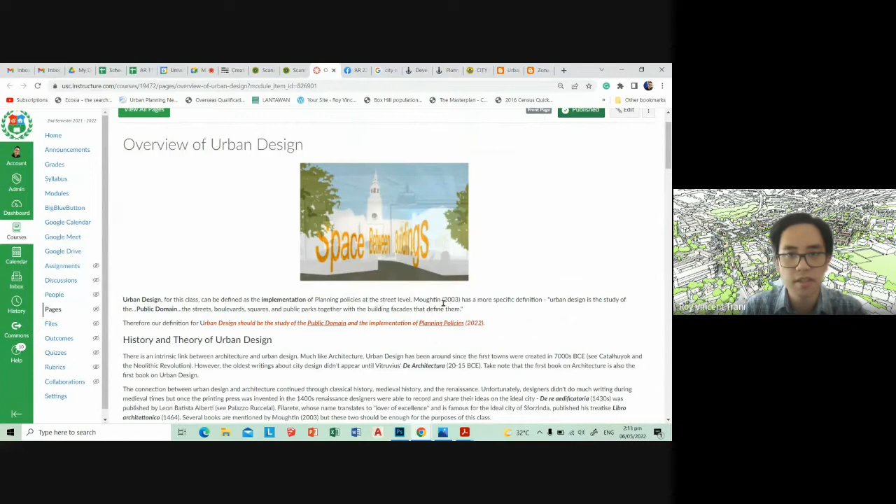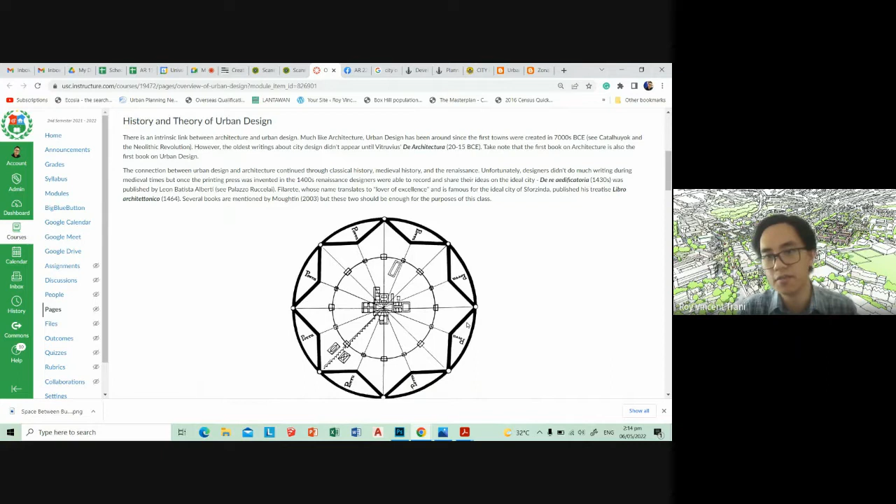Let me save this image here so we have a visual aid. And then we have the history here, starting out with ancient history, basically very focused on geometry. Dividing land was important because that's how people would get earnings or develop themselves. If you own more land, even back then, that meant you were like a king or someone important. And with the land you have, you could create your own food, hire servants, sell the food for money, and get even more servants, get even more land, etc., etc.

And then we had a renaissance, both in actual history and in urban planning, where the Renaissance architects and builders used principles from Roman architecture and combinations of Muslim and Islamic architecture, and basically architectures from different parts of the world to create this order, like what should be in a city, how should we design our public spaces.

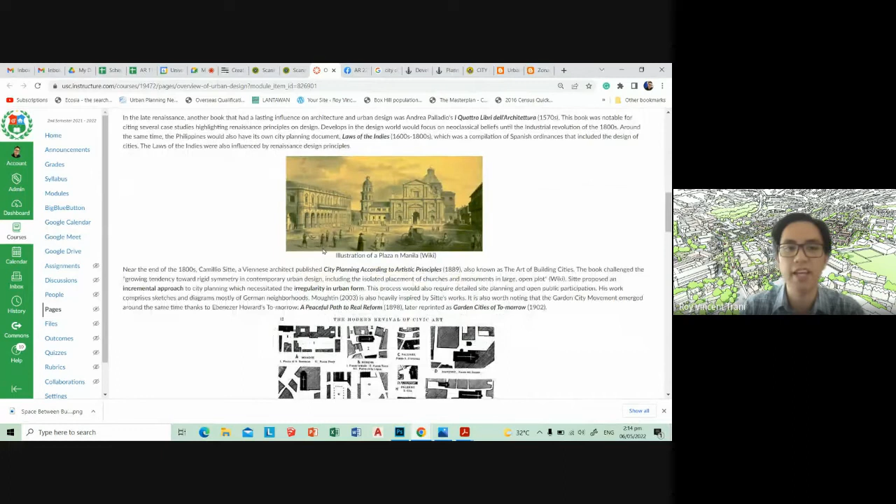And as we found out, the plaza is really the most important place in a city. It's a public plaza because it's a place where people gather, people see each other, the government supposedly showcases that they're putting the best interest of the people in mind, not just designing for the elite, but also for all the people.

And then the public plaza would be the location for where you have your church, your public offices, and everybody gathers there. Everyone important is there, and also everyone who is least important also gathers there. So it enriches the city where everyone, regardless of class, can come together and enjoy the space.

And then further developments in the 1900s basically have different ways of breaking down the different elements of a city. You have the path, edge, district, node, landmark. This was by Kevin Lynch.

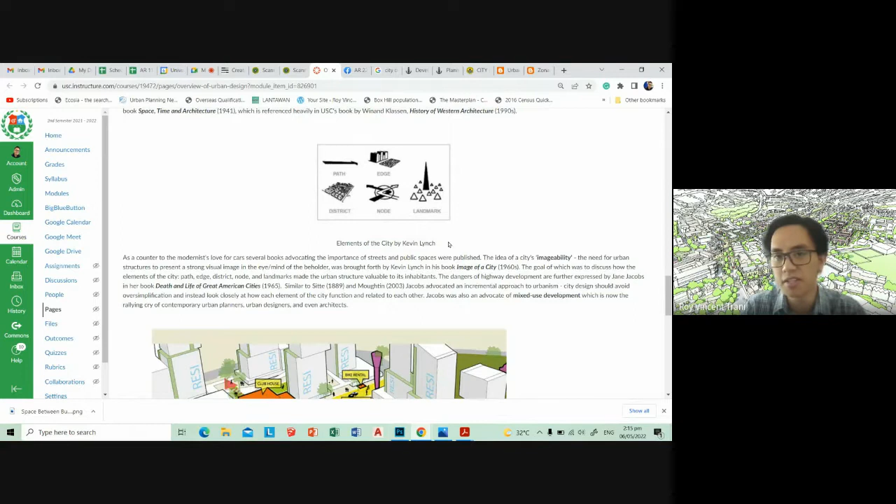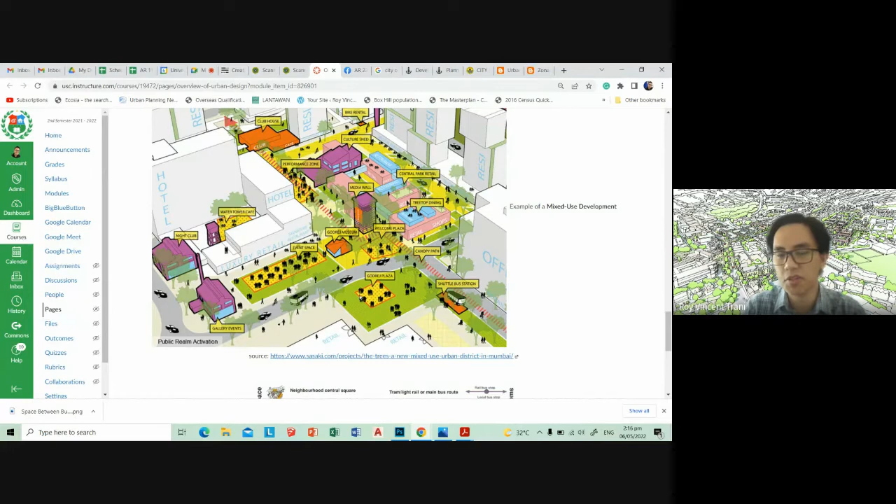And now there's even more subtlety and nuance in how public space is designed. So we're thinking about the uses, the mixing of uses, the importance of pedestrian zones, the regulation of vehicles, and the importance of spaces where the city can breathe, not just an open plaza devoid of vegetation, but also some kind of vegetation, especially in a very built up area.

And then we have the movements of the urban task force, talking about mixed use neighborhoods, but this is a bit more on planning. So how do you actually develop these mixed use neighborhoods? Um, what do you call this?

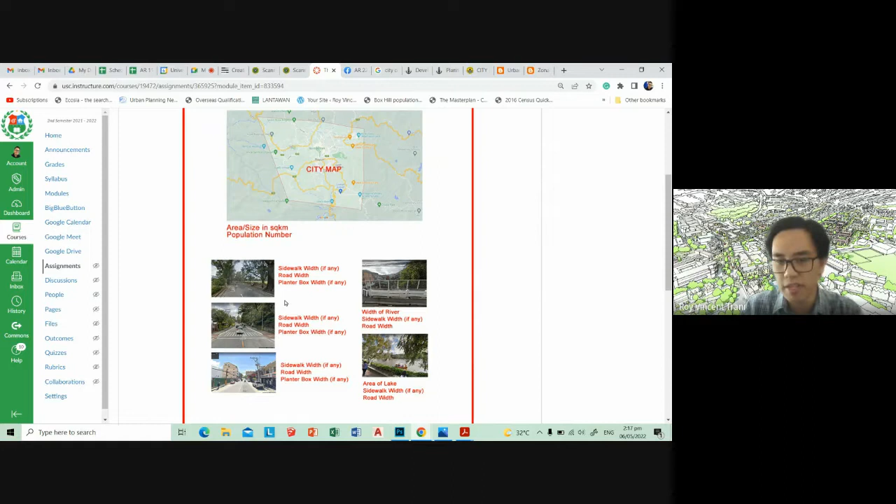That's why we are talking about the urban design process, basically evaluating what we have. For example, are your city maps? I think we'll need to do a callback to that. Like you already did this, and then just analyzing now with your knowledge of plazas and streets, you can evaluate where could be places that could be improved or where are places that should be maintained.

And then we had the history of urban planning here, urban planning and design in Cebu City, because this is the data that I have. I don't know about data in your specific local community, but at this scale, it's really more urban planning.

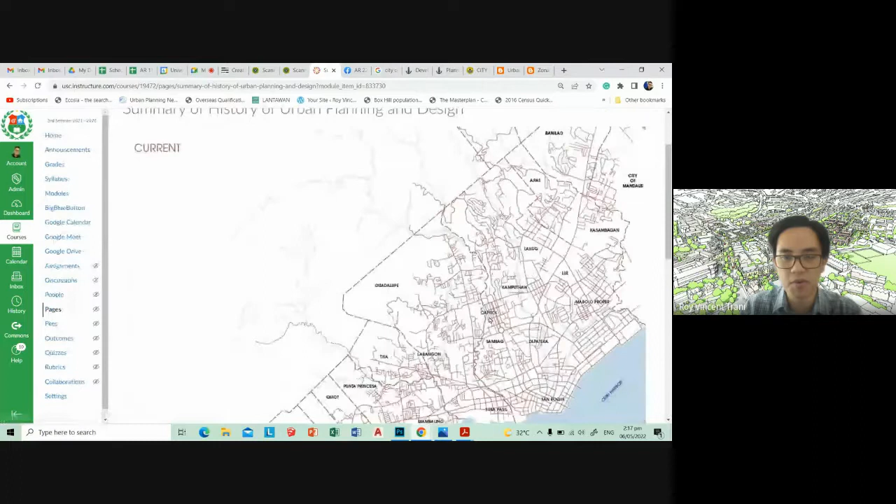So as I keep on repeating, urban design is really the street level. So everybody did that for the most part. Pasara mga tao. I think only one or two are having trouble with that.

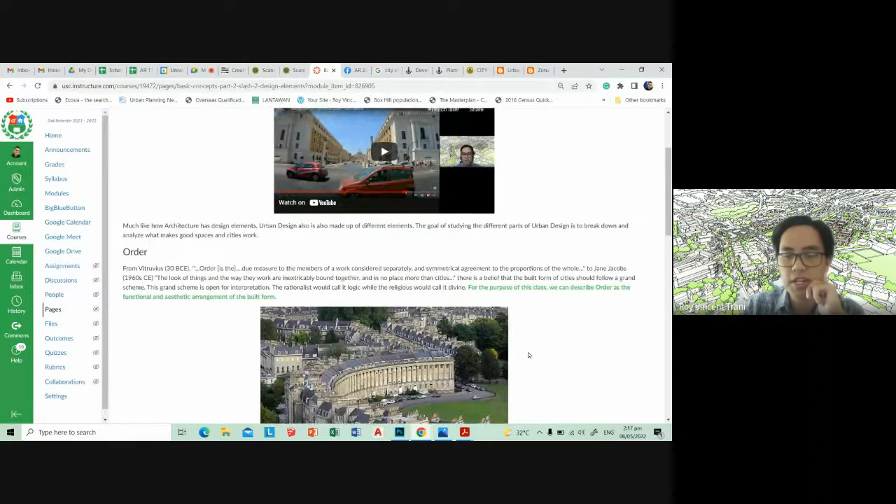And then the process of designing for people. As architects, we are thinking about just our building and not the surroundings. So really considering how our buildings are accessed. This is why our current plate, the bus terminal, is very much focused on accessibility and universal design, because we were trying to put the focus back on the people.

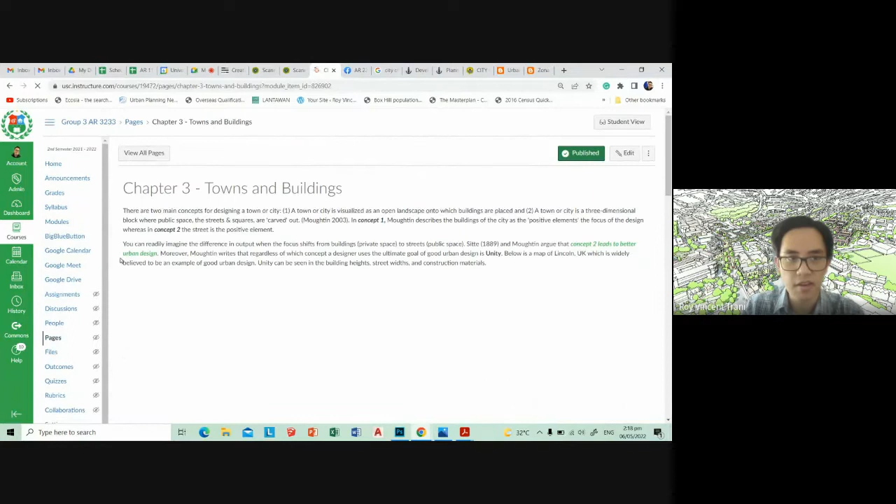So how do you create good design? You have order, unity, proportion, scale, rhythm, etc. And you have examples in Moughtin as well. Towns and buildings, talking about the 5 methods of composition. But before that, you have the two concepts, the informal and formal model.

With both these models, the focus is on the people. So this one is specifically about the positive elements in design, where either the building is a positive element or the street is a positive element. We want the street to be the focus of the design, and then buildings and landscapes are where we talked about the formal and informal models.

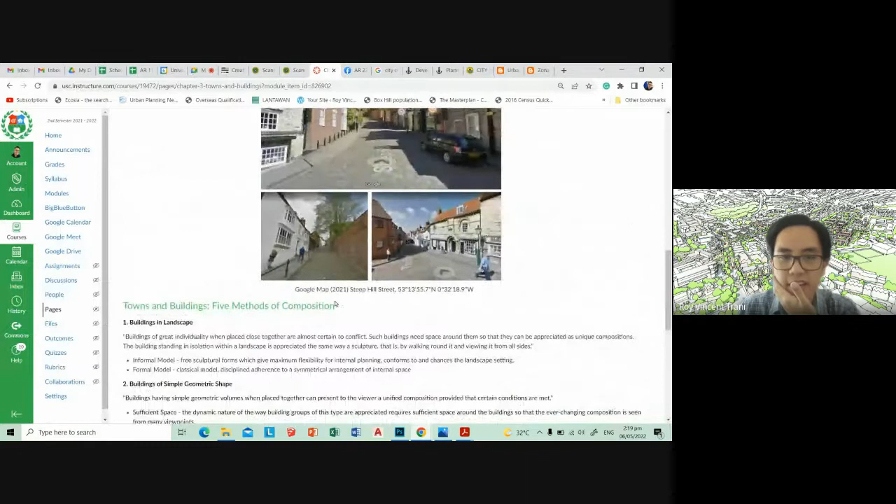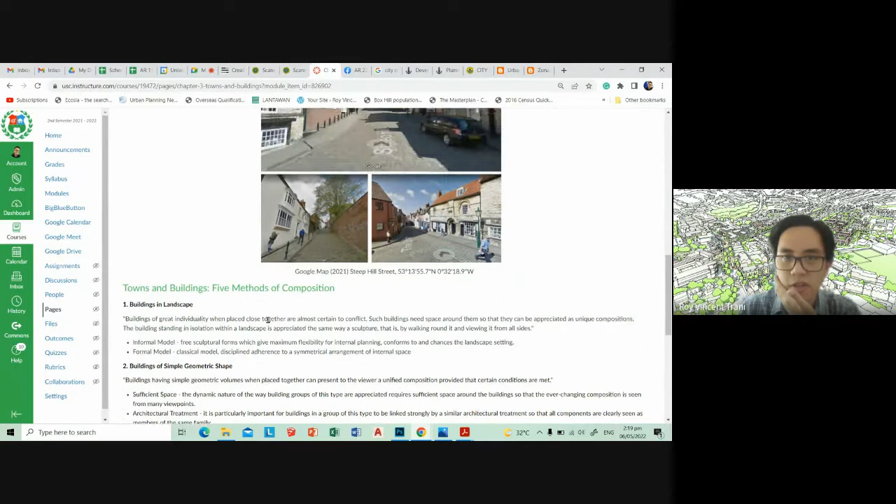Each of these five methods of composition build on each other. The first one is determining whether your area has an informal or formal building composition. Informal means more flexible, sculptural forms with less unity. Formal is the classical model, like similar building heights and similar architectural styles.

If you have either the formal or informal models, they can be arranged in either a simple geometric shape or the right angle. Then on a bigger scale, are these urban districts designed according to axial compositions or spatial compositions? Axial composition recalls the concept where the buildings are the main elements, while spatial compositions have the street or public space as the main element.

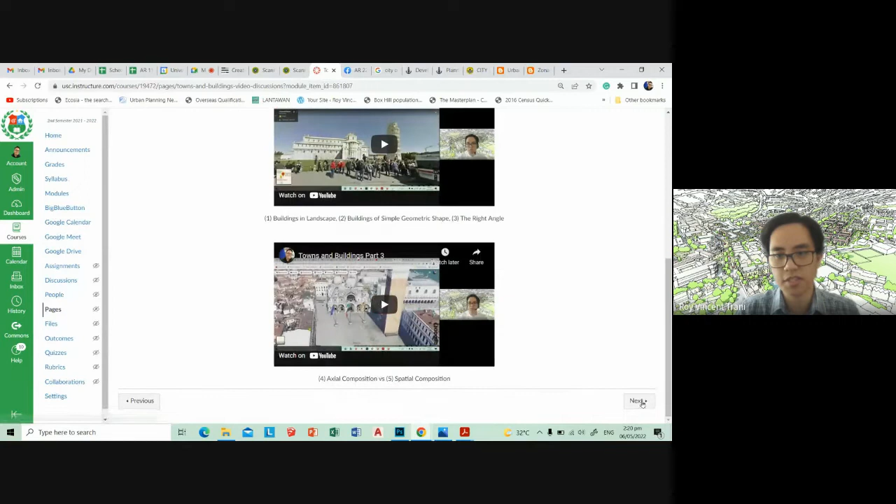And then the public plaza—really a gathering space, usually without much vegetation. There were five forms of plazas we discussed: closed plaza, dominated plaza, group or linked plaza, and nuclear plaza, meaning it has a strong node—I think nodal plaza would have been a better term since nuclear makes me think of something else. Then there's the amorphous plaza, without a sense of enclosure.

The example we didn't really discuss is New York Times Square. If we look at it in Google Maps, it doesn't conform to any of the four previous plaza types. You can't even tell it's a plaza—it's more like a very busy intersection.

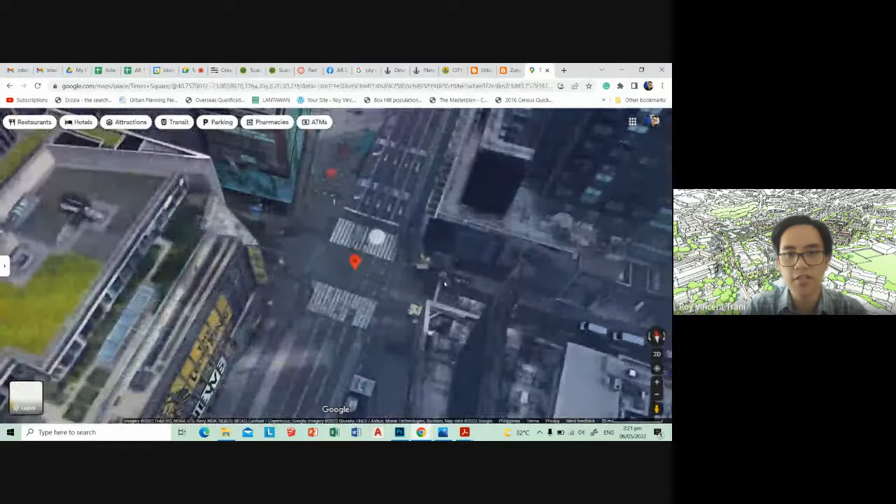Notice the sense of enclosure isn't provided by the buildings, but rather by the billboards. All the signage is more or less at the same height, but the proportions are very large, like 20 to 30 stories above human scale.

This particular sitting space—I thought they closed it down, but no, it's not closed. It's this small island, maybe covering a few blocks. I think they converted this recently, because on Google Maps it's still shown as a road. So there used to be a road here, and now there's an actual plaza. I think this is fairly new.

So it doesn't have proper enclosure—it's enclosed on two sides by vehicle roads and on two other sides by pedestrian paths or walkways. Actually, it's a road on three sides and a pedestrian walkway on the fourth side.

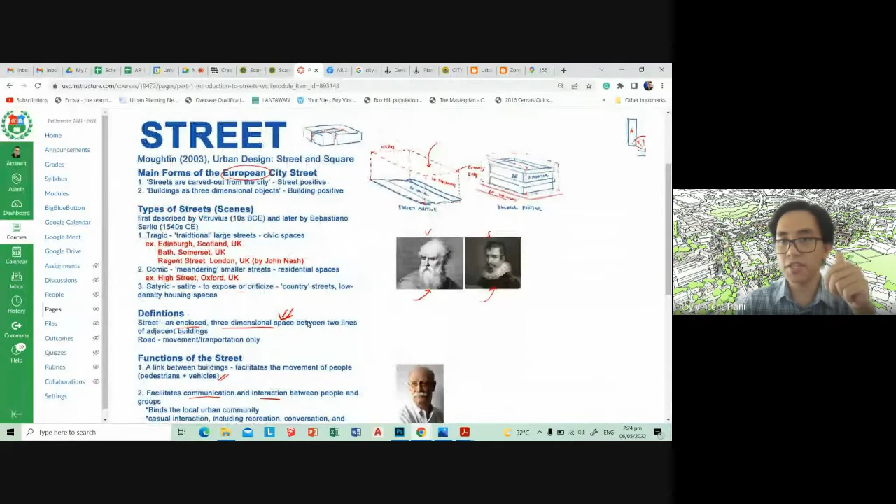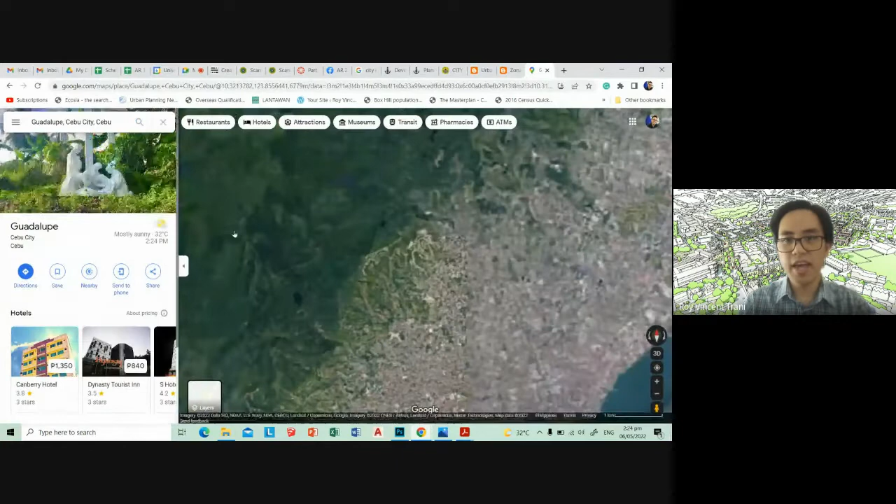So let's take a look at Guadalupe, for example—Guadalupe in Cebu, because there are Guadalupes around the world. A lot of us think that because we're in cars, driving or as passengers in cars and jeeps, that this street, particularly this part of Guadalupe, is very inefficient, like it's making our traffic slow, making our car slow.

But think about all the people who use the market space here, all the people who use the sidewalk, all the people who cross BDO to get to the markets, all the people who visit these spaces. This is almost like a mini plaza here, or an actual plaza.

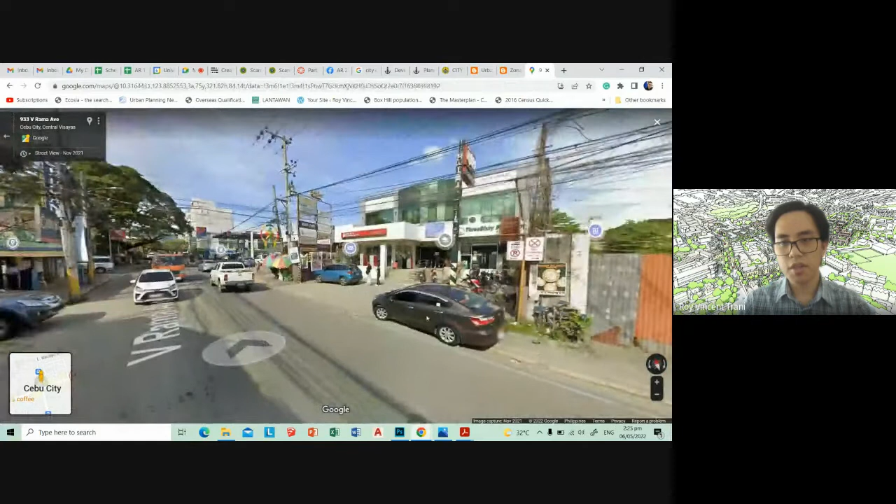Market, public area over here. This market provides service not just to those people nearby, but from the number of visitors—a good chunk, let's say the public market area here, the Banawa public market is that big, but its area of service could be much bigger because a lot of people are using the jeeps, etc.

So anyway, what I'm trying to say is the slowing down of traffic is really not so much an inconvenience in terms of urban design. It's just, I guess, the complaints of the car-dependent upper class, because the only people affected by the traffic here are the people trying to get to their homes.

If you're of the lower or middle income brackets, you wouldn't be able to afford your own private car, so you'd expect they'd be walking here or using public transportation to get here. So what Moten and I myself are trying to advocate is that we should rethink our spaces, not so much for vehicles, but really for people.

The other issue here in this Banawa public market is that it actually has a functioning sidewalk where people gather, communicate, and talk to each other. The only problem is that it's dirty—that's the main issue with a lot of people coming together. So how do we make this public plaza, this urban design space, better using the principles we've learned so far?

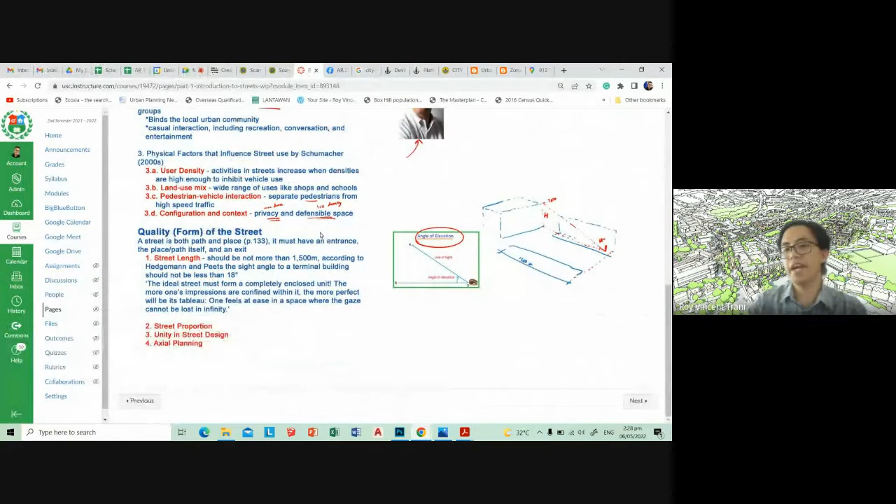So that's where we talk about the urban design guides, the building codes and regulations, and the principles we discussed about streets. I actually don't have the videos up yet—they're still downloading, or they've downloaded, but I need to upload them to YouTube. Some of the biggest factors—it's already 2:28—some of the biggest factors or key things you need to remember: if you don't remember anything, just remember this, the angle of elevation.

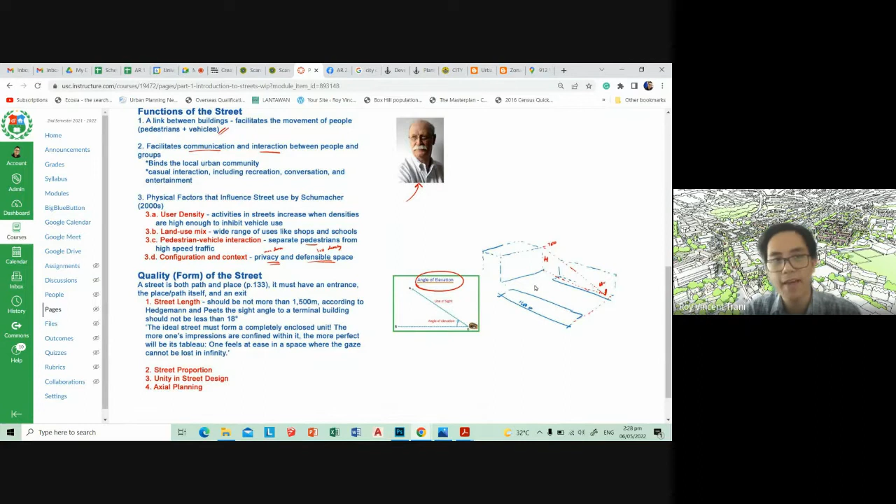That's basically the angle where people's line of sight can really absorb the height of a building or your building design. Streets and public spaces should take note of this angle of elevation. And as we discussed before, Cebu City was very good at this back in the 70s.

Where before, we had the Capitol building easily viewable or easily seen from Fuente Osmeña Circle. And now, because of people who don't know urban design, or people who know urban design not being listened to, and people who think tall buildings are a sign of urban development, like vehicles are the way to go—now this view of the Capitol building from Fuente Osmeña looks like this.

And maybe you don't have this view anymore. It's always like an aerial view looking at the Capitol. Who gets to see this view? It's the people in that hotel there, what's it called? Crown Regency. So that view is clearly from Crown Regency, or somewhere around there. If you take a camera from there, this is probably most likely a view from Crown Regency or one of these hotels here.

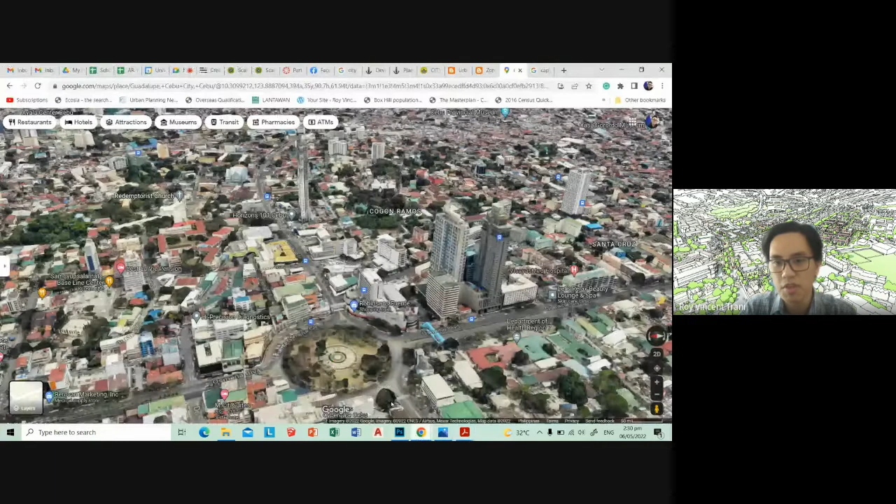Now, why do you think that's the most sustainable thing to do?

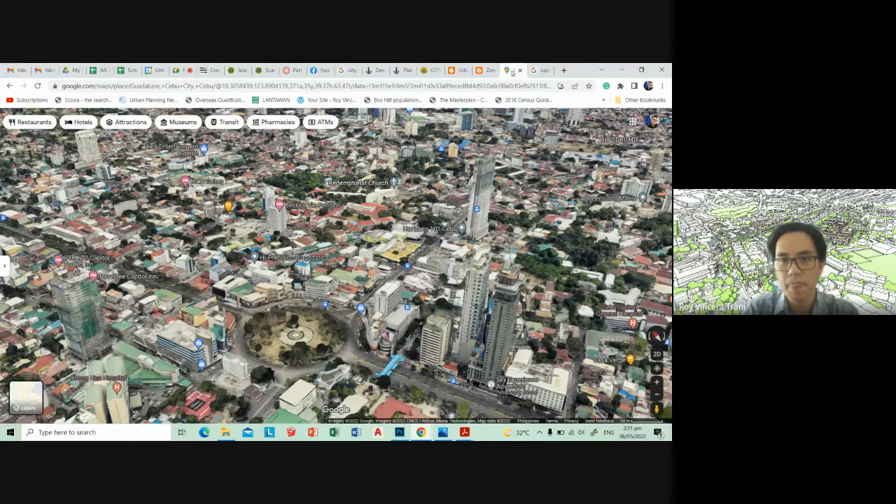So with all that recap, with your knowledge of urban design, plaza and street design, plaza and street forms, how do you think we can get Fuente Osmeña Circle back?

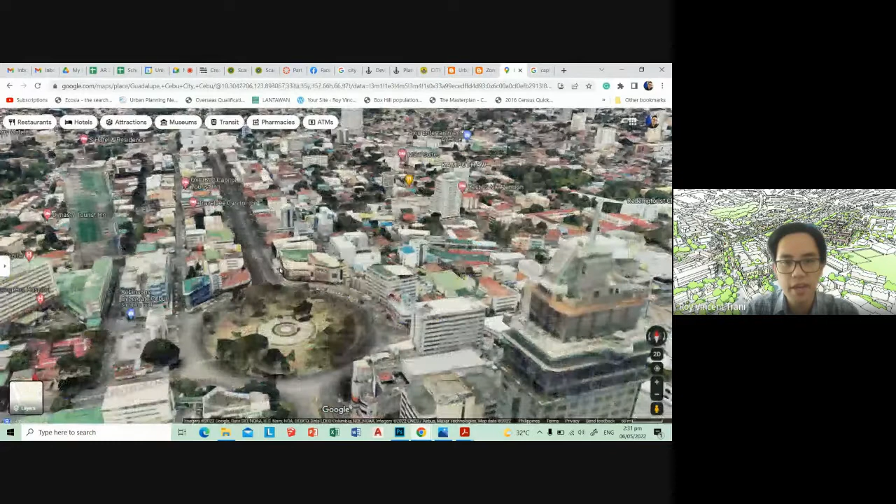Let me take a view here. How do we get that view back? What's going on? We can move a bit over here. Where is the Capitol building? Can't even tell. Oh, there it is. I think I'll move over here. How do we get that view back? This is it today, this is it before, like 1940s versus present. How do we get this back?

So for class participation or attendance, the floor is yours.

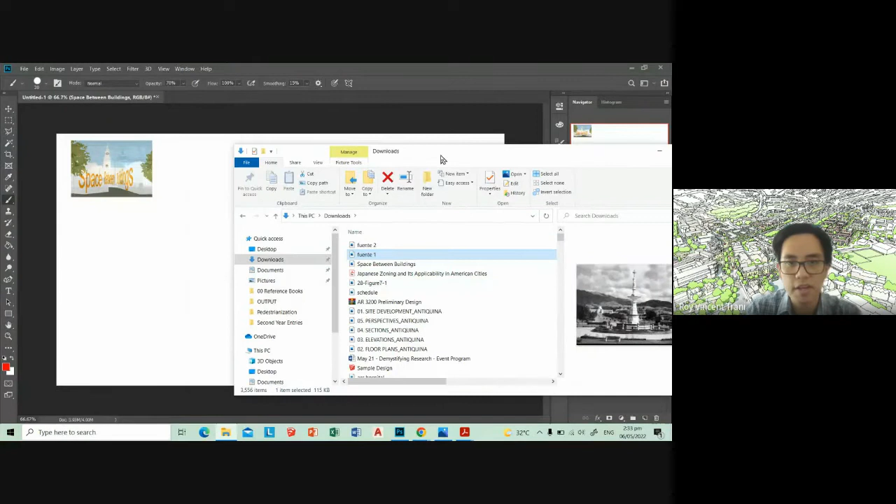And it's very likely that your areas are not suffering the same problem, but have their own unique situations. Probably a lot of you who are not in Cebu City have a lot of good urban places and spaces, and it's really more of a matter of maintaining those spaces.

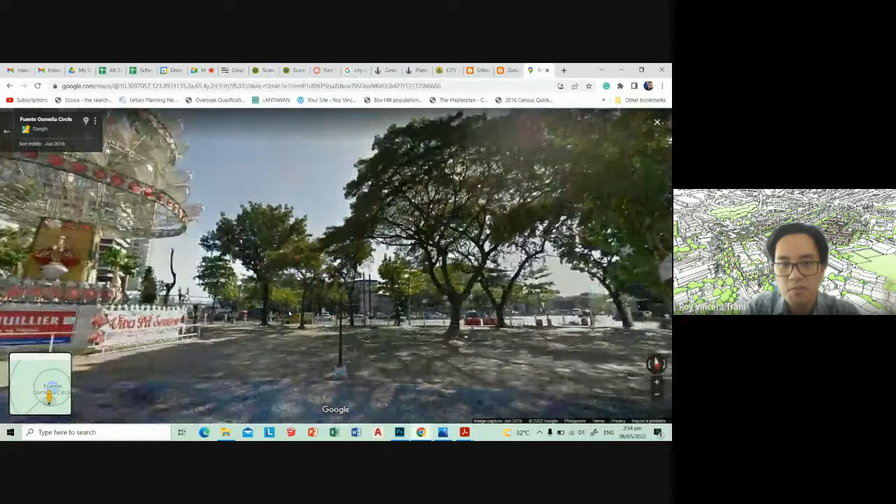To regain the view, I guess the only thing I can think of is cut the trees, maintain a certain height that will keep the line of vision. Really, yeah. It seems very anti-tree, but really these trees are not very good for maintaining the field of vision and maintaining a sense of place, because it isolates the plaza. It separates it from the urban fabric. I think the reason we're slowly removing these trees is a lot of people are realizing that. Some of the previous professors mentioned that at night crime is very high here because people couldn't see what was happening behind the trees, and it was very dark. I think now they're adding more light and reducing the trees to maintain the vision. Yep, that's basically it.

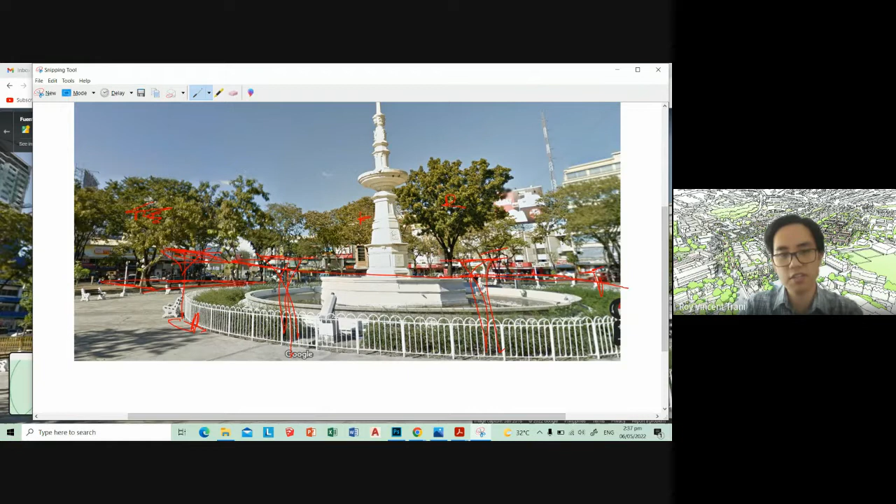Maybe we need some very light, small, shaded areas, not really umbrellas, but something here. And then definitely the most obvious thing is to remove the trees. How do we remove the trees? Maybe one by one, focusing on the areas highlighted here, something like that. And what else?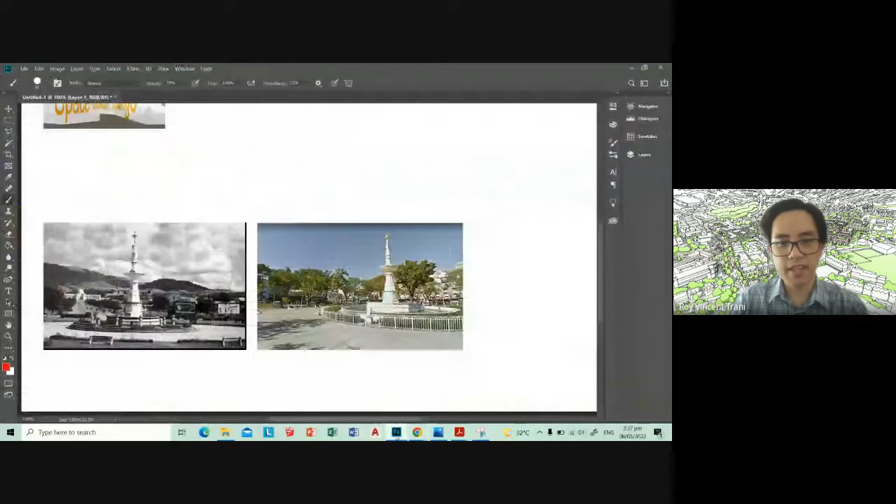So let's think about that. Let's see over here. Oops, not that one. How about this one? Okay.

So think about how many are from Cebu City. Let's see, could you raise your hand if you're from Cebu City? How do I have it so I can see everyone? 7 people. How many are from Cebu City? Please raise your hand and keep them raised because we might need to wait a bit for everyone to raise their hands. Okay.

Actually, for it to be more in line with our design project, let's just do it with our design projects. Like in your design, how would you improve vistas, since I know the site doesn't have a lot of vistas? How would you improve the urban design with the goal of giving people a view to the surrounding buildings?

The unfortunate thing about the SM site is there's really nothing there to view. So I think your building has to be the highlight of the design. How do you get your building to become more prominent in your design using the idea of maximizing the angle of elevation for viewers?

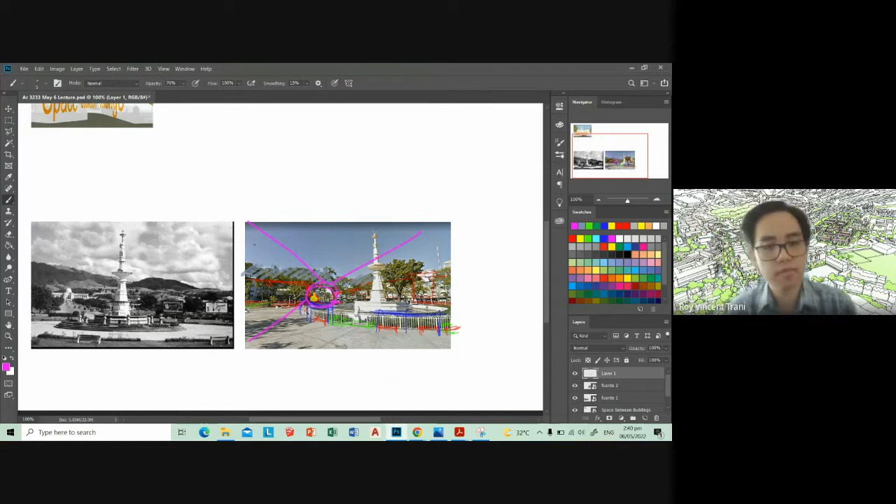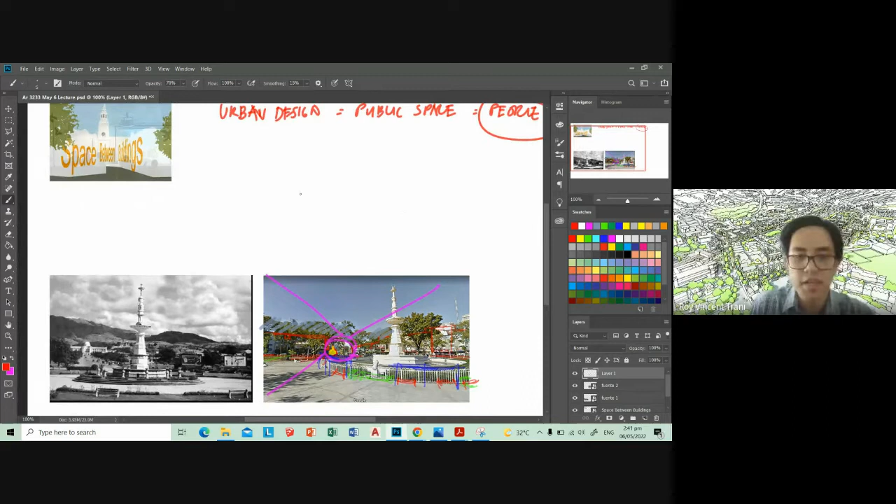Let's see here. Summary: urban design equals public space. And who wants to use the public space is really people, so no longer public space for vehicles—public space is for people. So the key thing we learned from plazas is that there's a limit to how big plazas can be. Limit plaza size to, let's say, maybe 50 by 50 to 150 by 50, maybe 200 max square.

For streets, they should be gathering spaces as well. And then we learned about the angle of elevation. Moulton would say 18 degrees, but some newer books would say 25 degrees. So the angle of elevation: you have your building here, you have a person standing here, and the angle of elevation relates to how far the distance is.

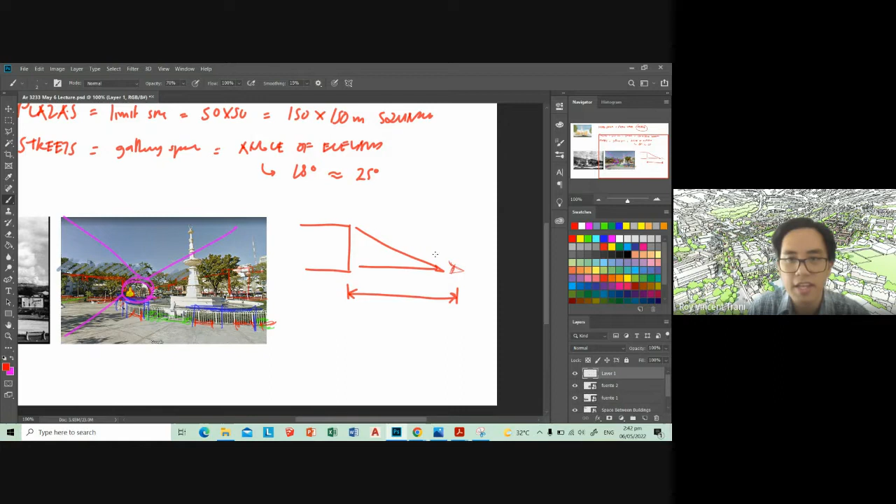Sorry, the angle of elevation would dictate how far your person should be in order to see your whole building. Let me put that onto his head, or maybe I'll just make an eyeball here, looking at the building. The angle is 18 to 25 degrees. So that's basically our whole semester.

Plazas need to be limited in size, and streets are gathering spaces. Whenever we design buildings, since we're also in architecture, we should allow for an angle of elevation of 18 to 25 degrees for our whole building, or at least maybe 3 out of the 4 sides, especially in our bus terminal. Let's just call this viewing distance, there isn't really a technical term for it. We need to maintain that for our building.

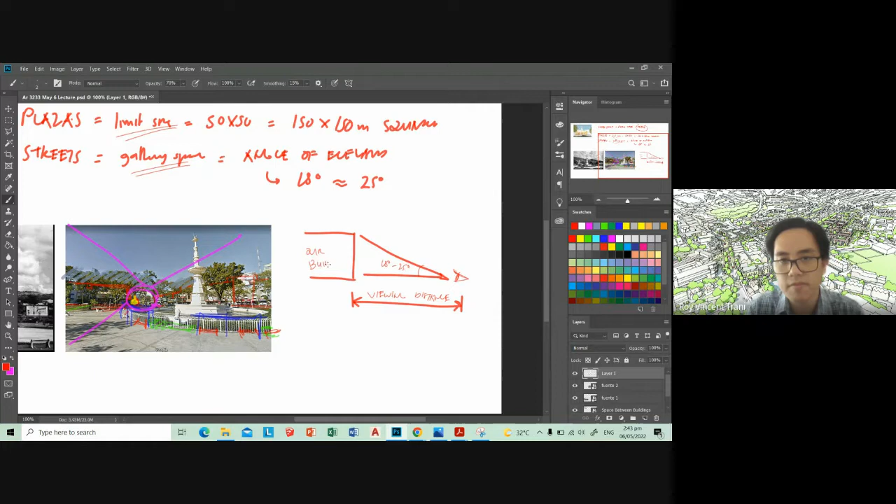Seems like people are a bit slow today. Oh, there's one here. Wait, that's for the Cebu thing, right? Let me stop presenting so I can see. There was only one person from Cebu? I think there's a few. Can I see a show of hands for Cebu? 1, 2, 3, 4, 5, 6. 6, right? I was expecting more. Maybe the rest are from Liloan or something, not Cebu. Probably a good reason why we should focus on your architectural design plate instead of Fuente Osmeña.

So for our final project, it will be a combination, I think more essay type. Sorry, we didn't really get to talk about the standards. Essay type: application of urban design standards in your bus terminal.

And there's still that one student, Paglinawan. There she is. Ooh, it's kind of hard. Maybe I'll just give you a reading assignment, and we'll get a presentation from you. You skipped out on 2 presentations, maybe we can have 1 big presentation for you. Plus, I don't want to hassle you as much since you're already graduating.

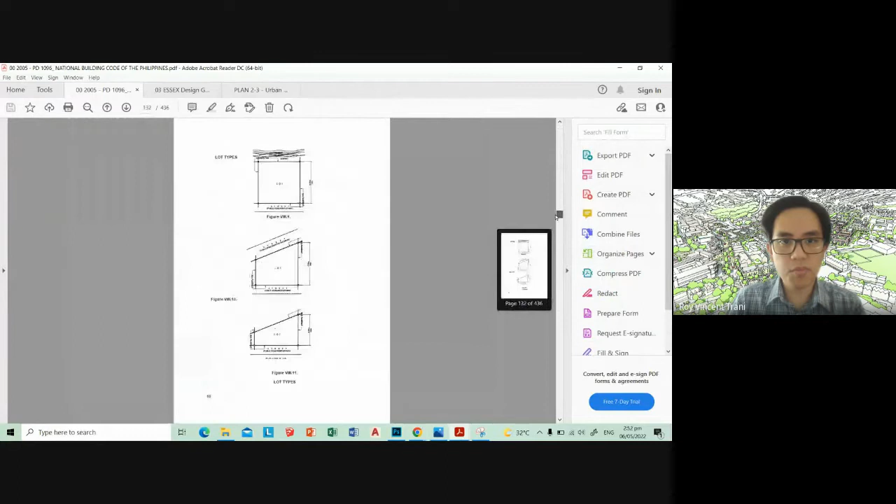So what are these urban design standards? Let's look at the building code, I think this is the most familiar. If we go down here near the middle, somewhere a bit more here. This is section 7, G1, figure 8 G1 under easements. So we have sidewalks, carriageways, promenades. Promenades are basically just wider sidewalks. This is more waterfronts, easements refer to waterfronts.

Do we have, let's see here, we have the water line over there. Maybe this is where I can introduce the waterfronts. I'll handle the waterfronts because we already had 2 rounds of presentations. Maybe we can get Paglinawan to help me with this.

And then over here, we have view corridors and sight lines. The carriageway portion of road right-of-way shall be free of structures, particularly commercial signs that will impede view corridor and the sight line, see figure 8G4. So I think we'll see that here, this is the 8G4.

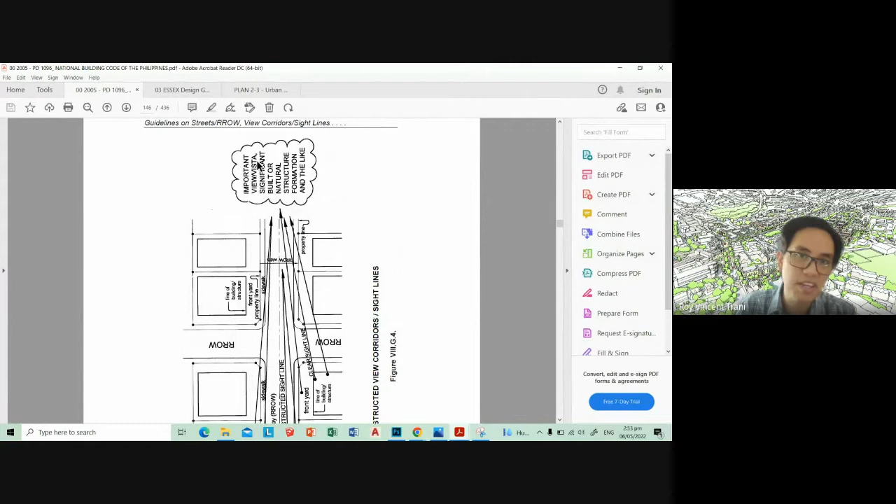So this is already in the law, but for some reason we didn't apply it in the Fuente Osmeña Circle. Like the important building here, important viewing, view/vista, significant built or natural structure, formation, and the like. But they did not apply this in Fuente Osmeña.

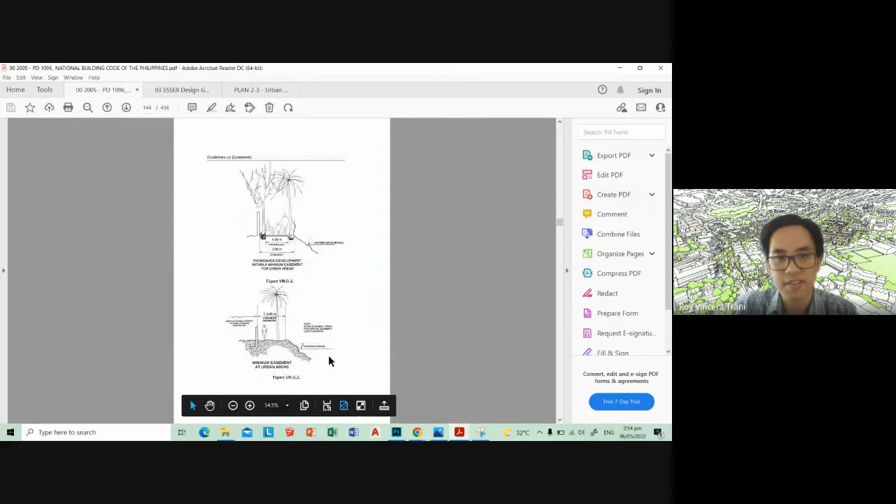Like clearly it says here, the road right of way. Let me go back again. Clearly on view corridor, section 8 of the building, section 8 of, what do you call this. Section, I think this is under, it's not even 811, which is artificial ventilation. Guidelines on easements, view corridors, this is a different section. I think this is still under, definitely not anymore under artificial ventilation, but it's its own section.

Basically, the easements, view corridors, sight lines, street, road right-of-way section of the building code, which is in section 8, already says that we should maintain these things. We should protect our sight lines, corridors, and important vistas.

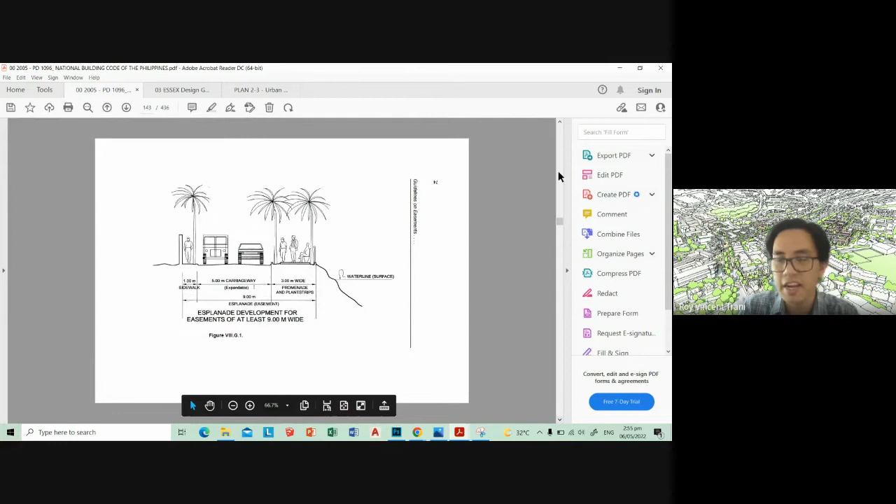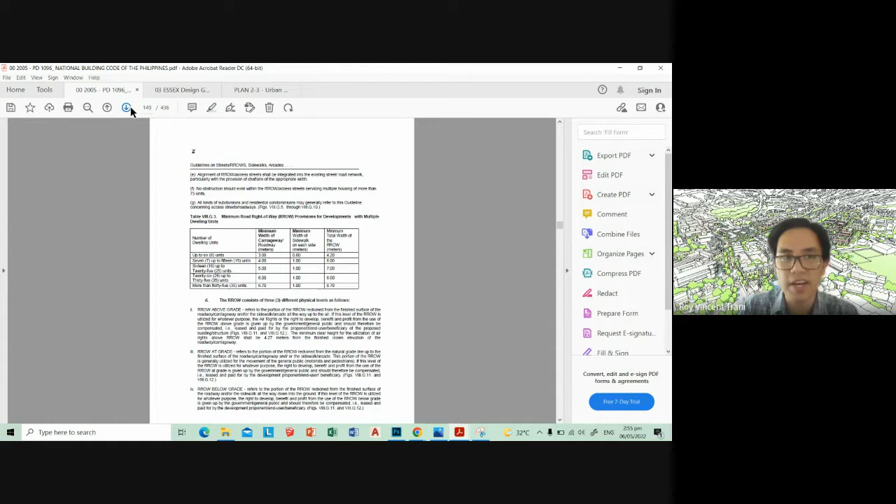But as we all know, the immediate monetary gain is not very apparent, so it's not maintained. Whereas if it was maintained, we would have more tourist sites because these vistas generate economic income or activity. But it's very long term, and with the way urban planning and design is being done today, the ideas are very short term. Like how can we get money right away? And then it's usually

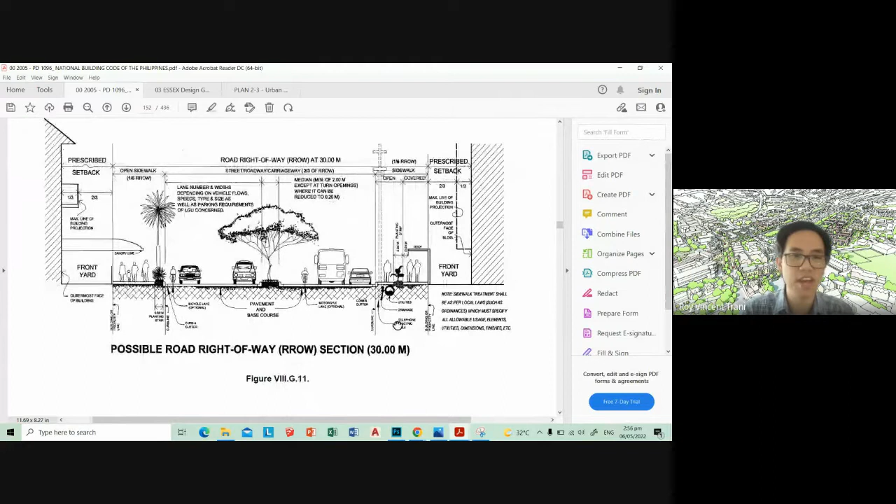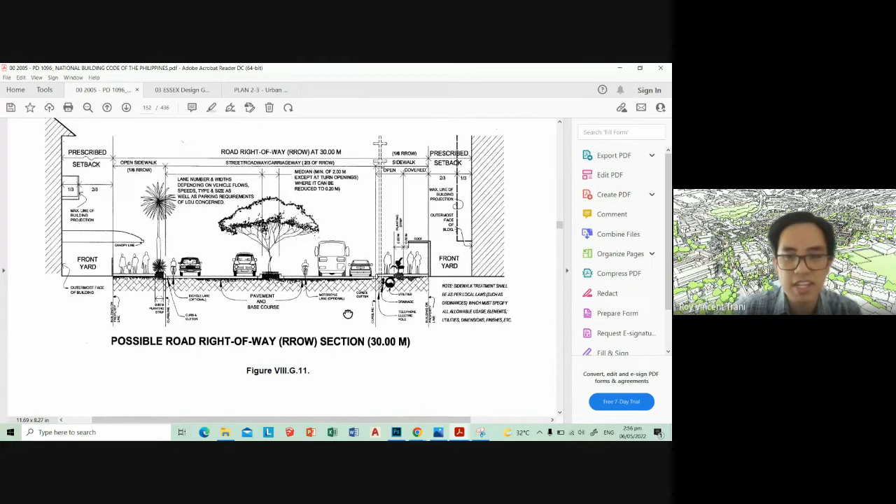each public project is in line with a new mayor, and very timely with our elections. If you're going to vote for someone who's willing to look long term, who has the very generic ideas of promoting the welfare of the public, if they have track records of creating good public works in your local community, vote for that. For me specifically, personally, the mayor is more important than the president.

Because whatever the president does, it really only affects the Luzon area. Rarely, in my 30-ish years of life in Cebu, can I say that the president of the Philippines really affected life in Cebu. Maybe gas prices is the biggest thing, but the mayor is really what affects our local community.

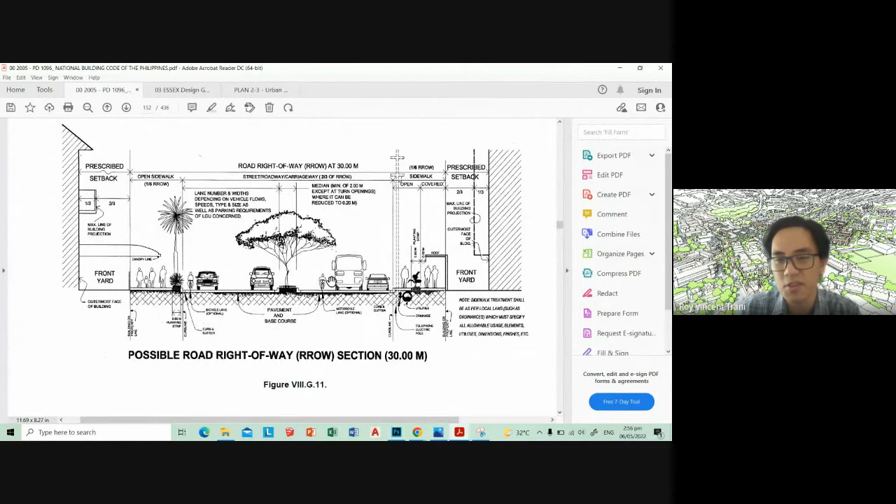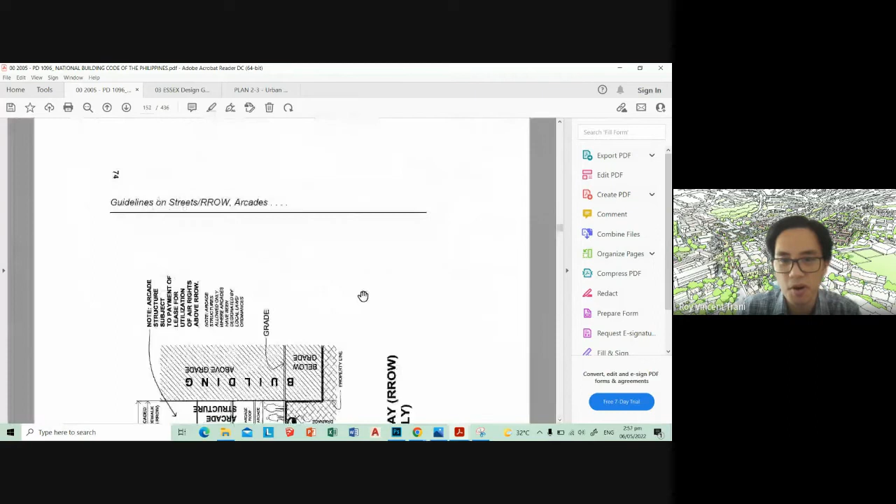And in terms of urban design, the mayor and the LGUs are really in charge of how these local communities develop and how we can protect our vistas and create better public spaces. So yeah, for me, I'll be looking more at mayors and barangay officials, because this is really what I think Cebu City needs. Whoever becomes president, as long as I'm focusing on the mayors and local officials.

Also, I think other standards here are more for ventilation and natural light, where the building setback is done this way so that all of the buildings, all of the rooms in this street corridor will have access to natural ventilation, and we won't have something like this where, what do you call it?

Let me zoom in a bit. The reason why we want our buildings to taper as we go up is so that each floor has ample access to natural light and ventilation.

But the actual building will look more like this. We'll taper, maybe set back here with the rest of the building like that, or maybe it's set up podium-type. Ideally, everyone should have access to light and natural ventilation.

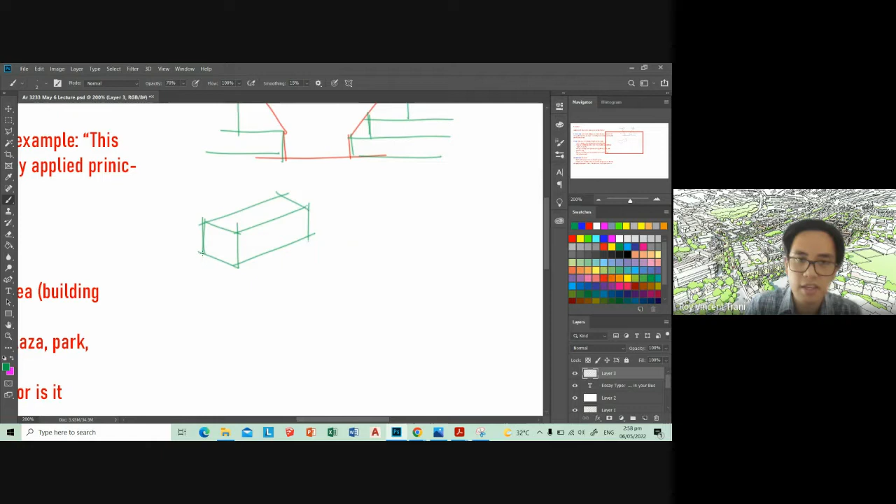When you blow this up into a street drawing, you'd have a setback like this. Ideally, to make this good urban design, the building on the other side of the street would also be a similar building height.

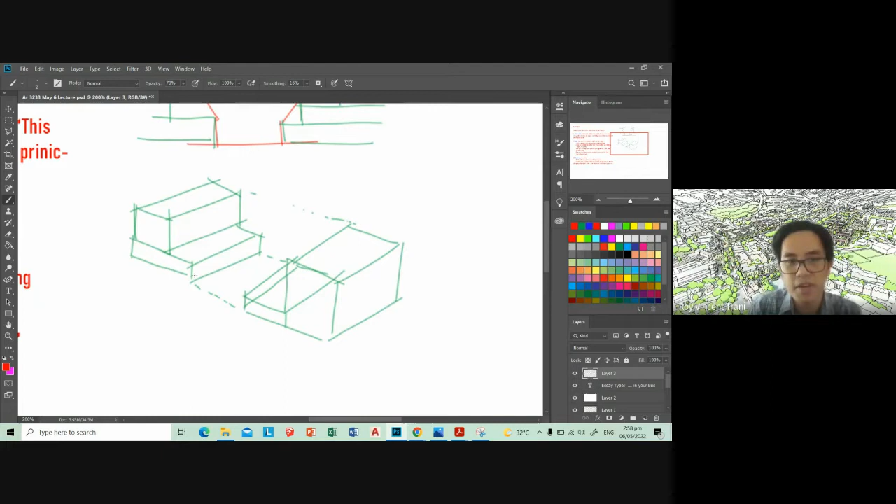Really, the main element determining these policies is our streets. People can gather here. There's space for shops, bicycle lanes, sitting, and trees. Usually the trees would be between the vehicles and the people, acting as a natural buffer.

But in the middle of the road right of way, opposite to what's happening in Fuentes Mena, there really shouldn't be any planter boxes here, because as stated in the building code, the road right of way should be clear of any obstructions.

I don't know whose idea it was to put the island there with a bunch of trees, but they clearly did not know what they were doing. They were maybe just trying to get points with the local officials. I don't know who decided on that, but it was a very bad idea. Not the worst, but I really can't think of what could have been worse. Actually it's pretty bad, the more I think about it.

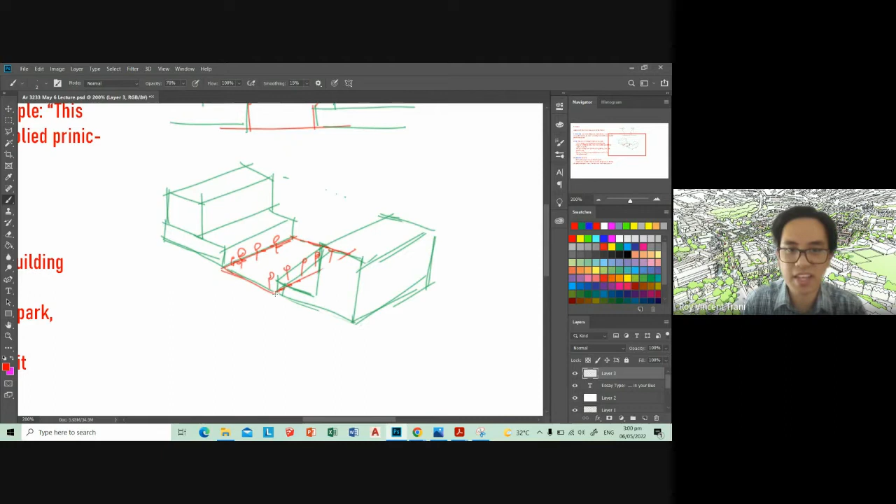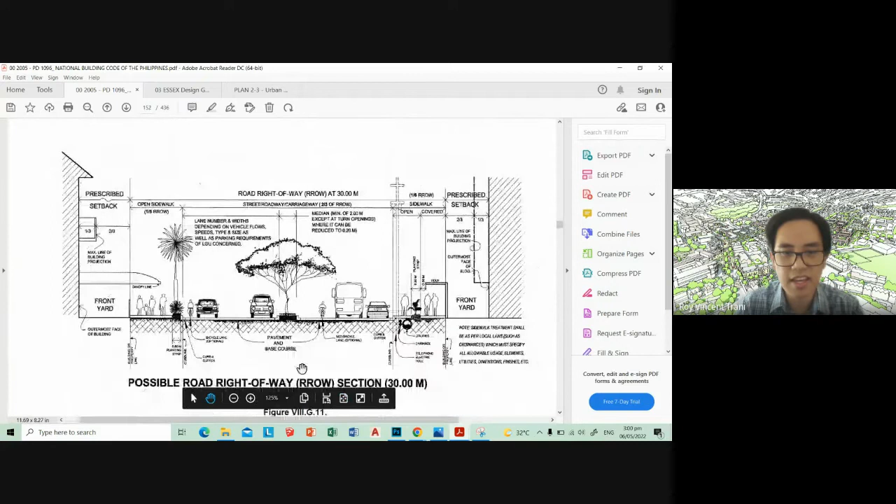But this should be the ideal street. I just realized this page here could also be the problem. This might probably be the first thing that needs to get updated as soon as possible, that this tree in the middle should be placed on the side instead.

So this kind of development, it's good to have trees in your public spaces, but I think we can get more use out of the street if the trees were on the side, increasing the sidewalks instead. The only users benefiting from these trees right now are the drivers. So you can see the people who made this law weren't thinking about the people on the sidewalk, they were thinking about the people in the cars.

It would be much better to have trees on the sidewalks, so actual people on the sidewalk can use them, instead of this being for the cars.

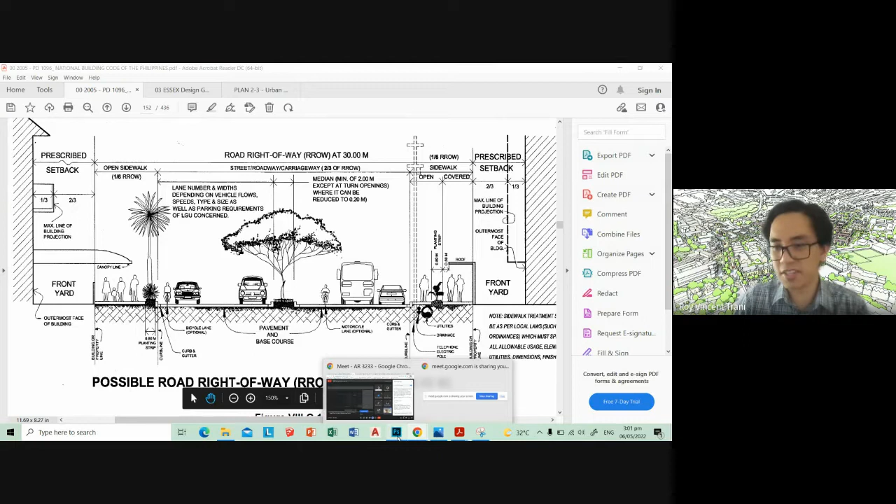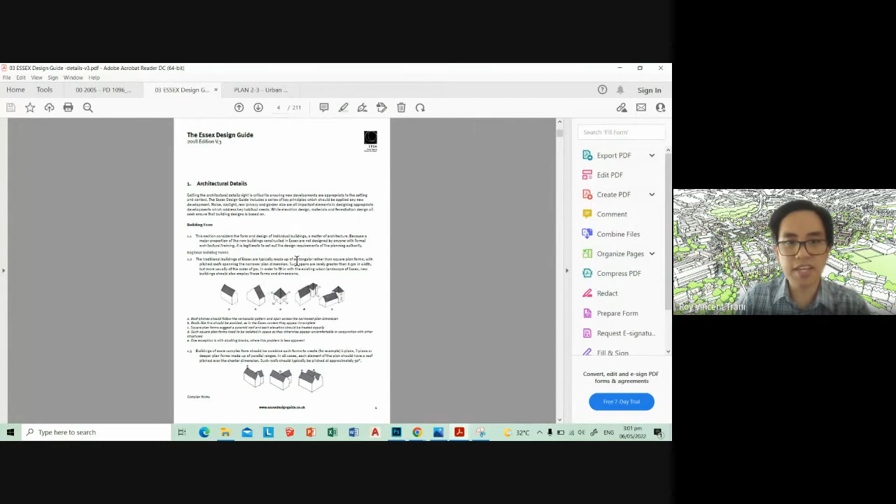Okay, just a few more notes. Let's look at the Essex Design Guide, which I'll be sharing with you later tonight. This is just something for you to see. The Essex Design Guide covers architectural details, talking about building forms.

This section considers form and design of individual buildings, a matter of architecture, because a major proportion of new buildings constructed in Essex are not designed by anyone with formal architectural training. It is legitimate to set out design requirements of the planning authority. Essex is actually a place, if you didn't know, and this is their design guide for their local community.

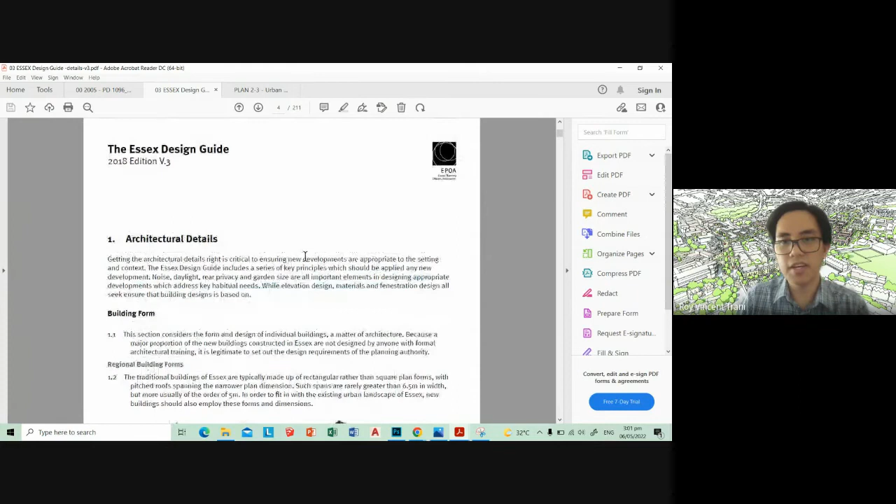This is from the Essex Planning Officers Association. It's probably one of the older cities in the London or UK area, and they have a very strong building code or design guide. As mentioned here, most new construction isn't made by large companies who can afford architects.

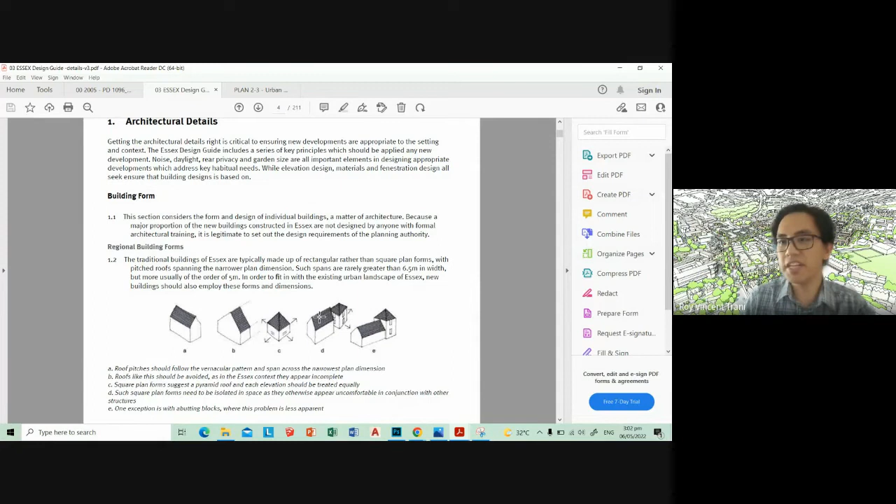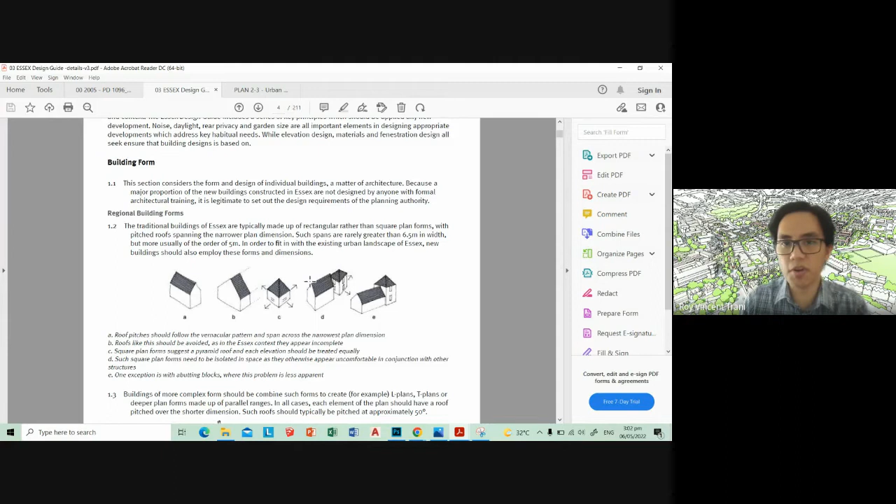Actually it's more about DIY extensions to homes in their local community. So this is meant for non-architectural professionals, more informal or DIY builders, carpenters, and basically the local community who can't afford architectural services. Even in this setting, you can see everyone is considered, not just those who have money, but those living in an old house who want to extend it themselves because they can't afford an architect.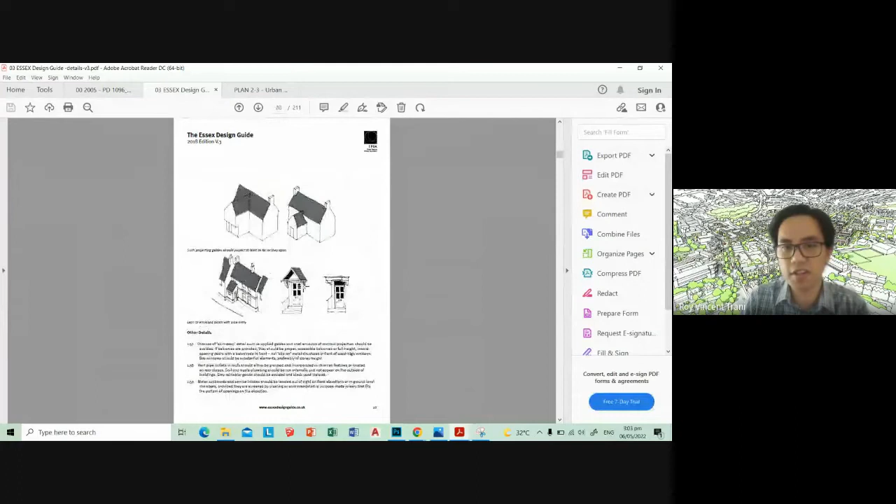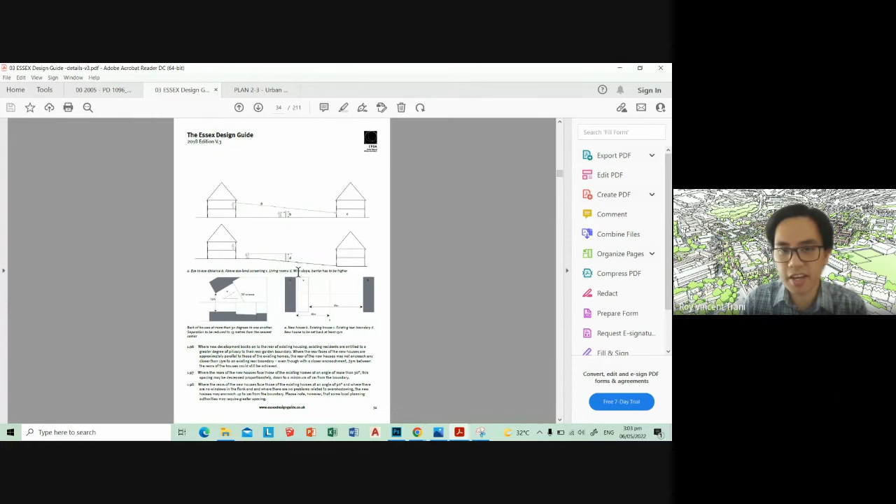Look at it: building materials, building heights, roof colors - it's all detailed here. The people who created this design guide are the local council, the local government of Essex. They have like privacy achieved to vegetation, sight lines, very clear dimensions for that. This is a 211-page document that basically tells you how to design for a local community. The problem is it's contextualized for a UK setting with UK attitudes and culture.

So the next step for us, aside from really changing our minds about how we plan our local environment, is to look at good practices abroad and contextualize them to our own setting, whether it be Cebu City, Butuan City, Bogo City, or wherever municipality you're from.

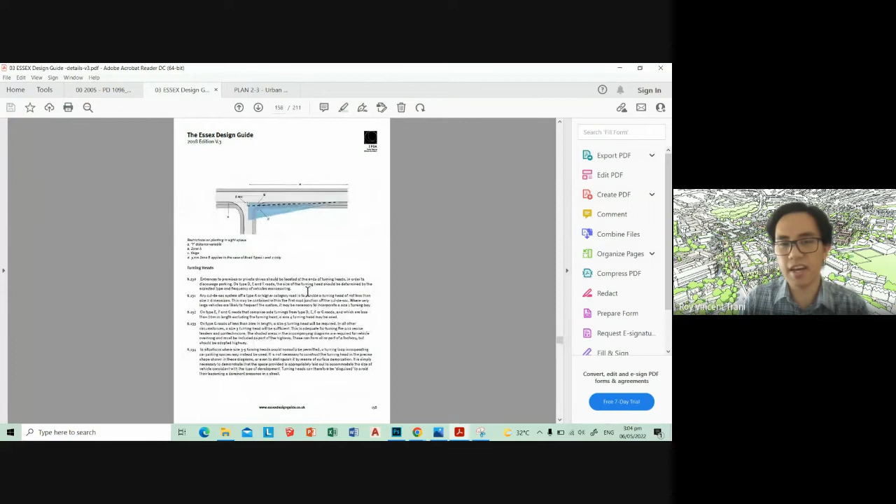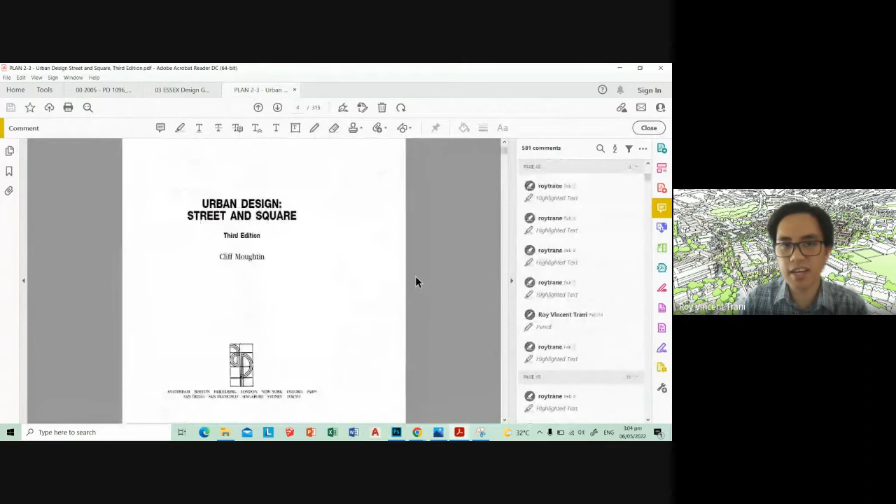For my own class, and our class as well, we can spend maybe 2 weeks going through the designs, dimensions and standards described here, compare them with Philippine standards, and then compare them with Moughtin as well, because we pretty much went through half the book. The rest of this book just describes the same thing as squares, but with bodies of water.

Sustainable urban form - I think we're all familiar with this. Visual analysis and case studies. Let me check what's in sustainable urban form. Seafront - I don't know why that's a sustainable urban form. This is basically urban planning, we already discussed this.

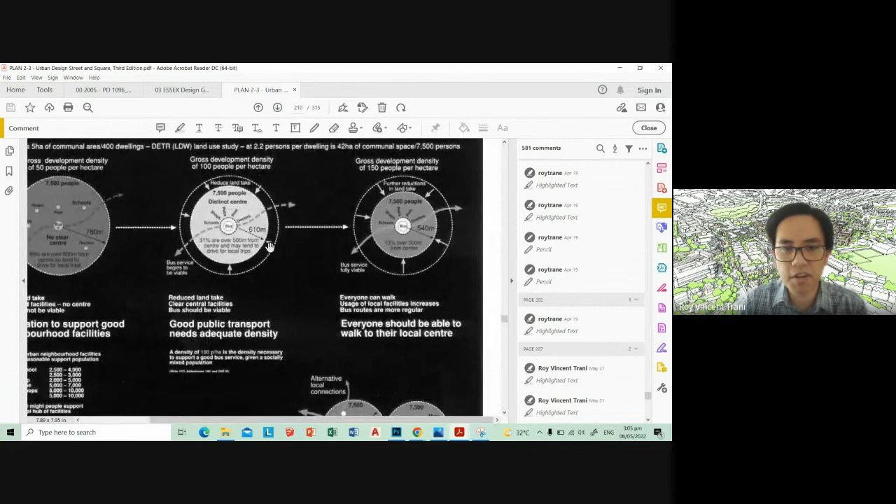Good public transport needs adequate density population to support good neighborhood facilities. So they're thinking about cities within a 500 to 600 meter radius, and every 500 or 600 meter radius you have a node sort of development or a major mall, basically encouraging public transportation and more cycling, more walking.

500 meters in the UK - how long does it take to traverse 500 meters? Let's see, meters travel time. So a car, it's 22.5 seconds, but for a person, walking speed is about 5 to 6 minutes. Maybe for Filipinos it will take about 10 minutes because we have shorter legs and thus shorter strides.

So they're really designing it according to non-vehicular traffic. Let me see over here - so basically what I've been saying since before in our urban planning classes, that's basically it. We already discussed this: less high rise, more low rise, medium dense coverage.

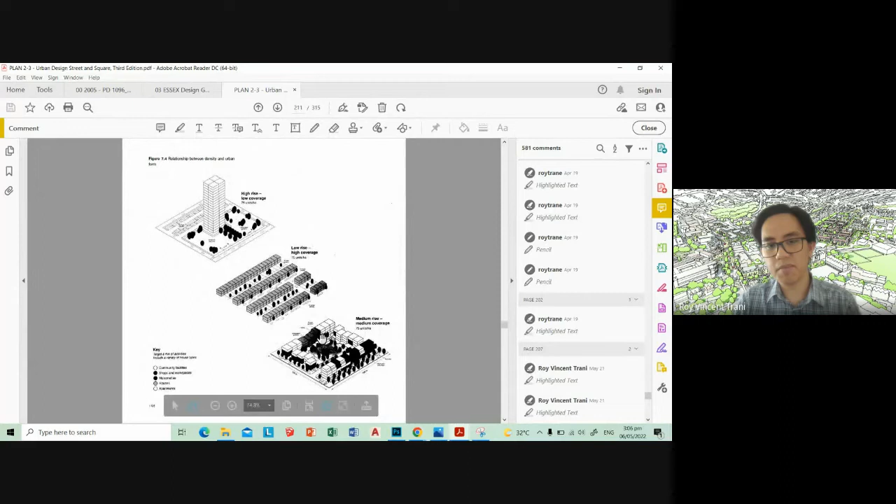I can highlight it a bit, but this just goes to show that the European countries, the developed countries, are really talking about reducing building heights but maintaining that density by making smaller, friendlier community developments.

And already we're seeing that here in Cebu, but they usually happen without the aid of the government. That's why we have these slum areas - not really slum areas, but low cost, low income development areas. Instead of saying that these are bad - well, technically in a way they are bad because they're not supported, they're kind of left to themselves.

If we could focus our building technology, our expertise, to help these communities grow, we can actually impact a lot more people than those who can only afford to live in IT Park, for example.

So that's an example of how architecture can impact the community using principles of urban design. In IT Park, very clean, very wide sidewalks, but really it only caters to a very select group of people - maybe, if we're being generous, the upper 40% of Cebuanos. I think 70% of Cebuanos live like this.

They live in these sort of neighborhoods, and they really need our attention. Look at that guy on the roof there. They're very prone to fire, very prone to typhoon. Every time there's a natural disaster, it's these communities that pay the price. And as we all know, they're kind of left alone by the government. So it's our job as the educated, and because we're also Catholics, to do outreach, blah blah blah.

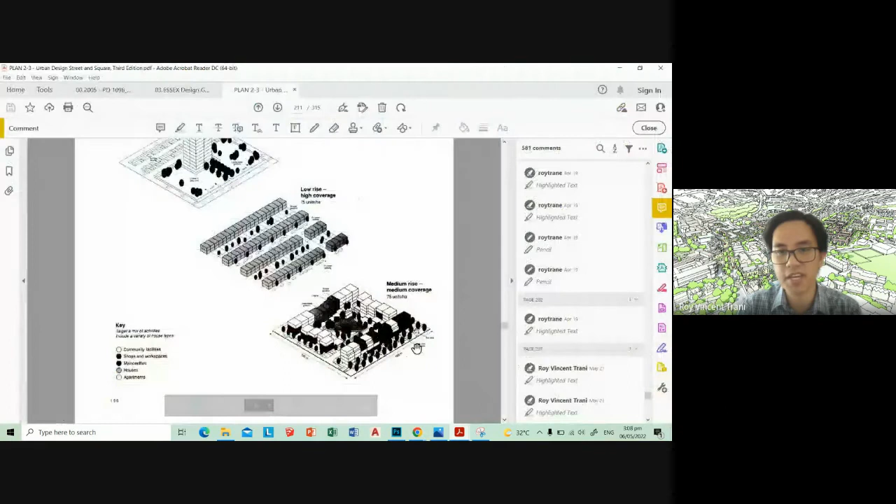This would be a very good thesis. How do you incorporate ideas like being shown here in Moughtin, the Essex Design Guide, and development control plans in Sydney. In other developed countries like Sydney, these documents - community strategic plans, environmental strategy plans, city for all, socially just, blah blah blah - are all available to the public and shared with you now.

Compared to that, the Cebu City Planning and Development Office has nothing. There are several reasons for this, probably because they don't have funding. Even the government itself doesn't think it's important to do this. So yeah, this needs to change. It has been like this since I was in high school, but maybe it's about time. 20 years ago, it's been like this.

But I think slowly, with the help of the faculty members of USC, other architects in Cebu who are Cebu-based, and maybe Manila etc., the conversation is starting, and there's a little bit of movement. We can see that in the Metro Cebu sustainability roadmap. But it's still at a very large scale, a very vague scale.

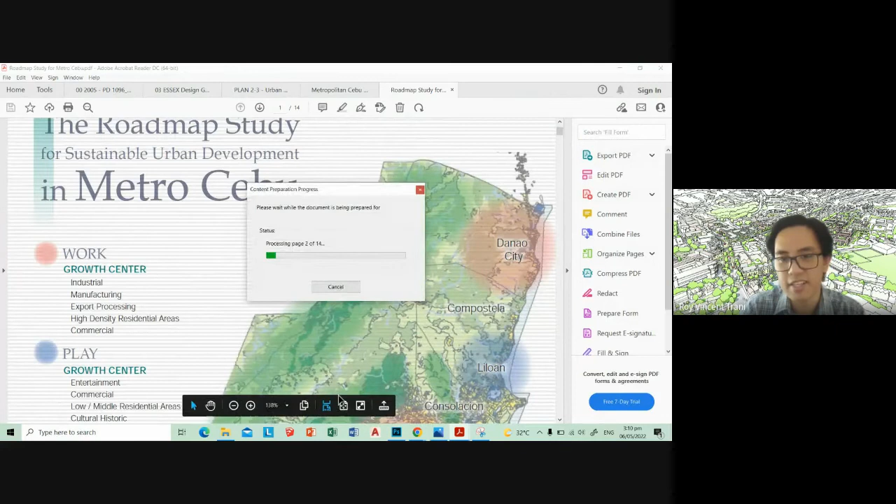I'm sure I've shown you guys this last time. This was proposed in 2015. Cebu City, Mandaue City, and Lapu-Lapu City will become the urban work centers, commercial centers, with Liloan and Carcar being what they call the entertainment centers. Exactly what that means is still pretty vague, but green buffers will be in places like Talisay, Cordova, and Consolacion.

So all very good ideas. It's a start, but really nothing so much on the street level - like how do we design our streets, how do we improve our public spaces, sidewalks, etc. So it's there, but not yet developed, and this is where you come in if you want to. Not forcing anyone to become urban designers and planners.

I think I have a meeting in a bit. I don't know, they didn't send me the link, but yeah. So Lance, you're raising your hand, or did you just forget to put it down?

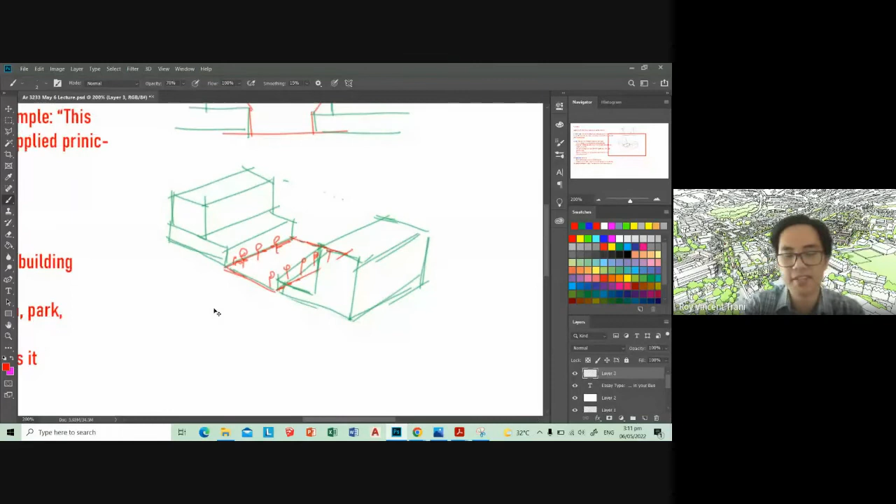Okay, so I was checking my email. Sorry, I accidentally pressed close slide. So for our final project, let's think about this.

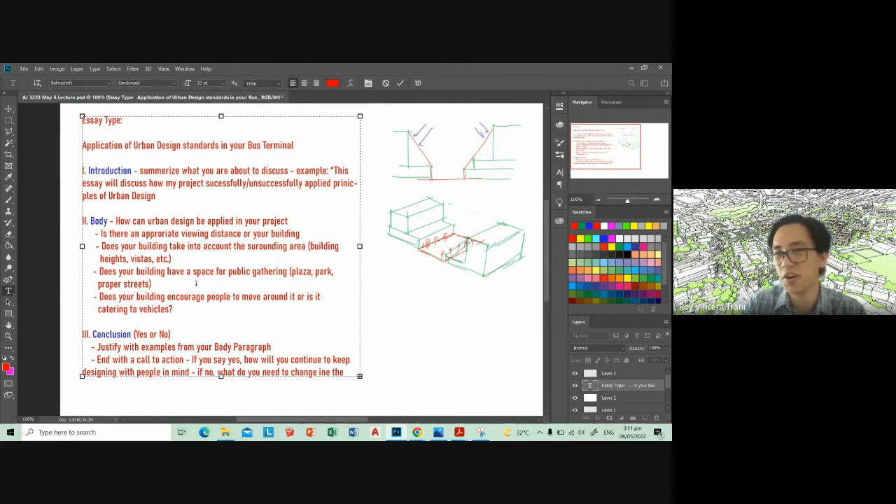Is there an appropriate viewing distance for your building in your design project? Does your building take into account the surrounding areas - design, heights, materials? Does your building have space for public gathering, whether it be a small plaza, park, or proper streets where people can walk, and maybe even a bit of space for commercial areas along those streets, like small kiosks? Does your building encourage people to move around, or is it catering to vehicles? Is there a vehicle road separating your possible passengers for your terminal building from crossing into your building?

And then yes or no - if no, what could you do to improve it? You don't need to change your design because it's already there. But basically, the goal of this essay - we'll have an exam as well as a final - is really to make you think about how you design your buildings and how you can improve them using the principles we've already discussed.

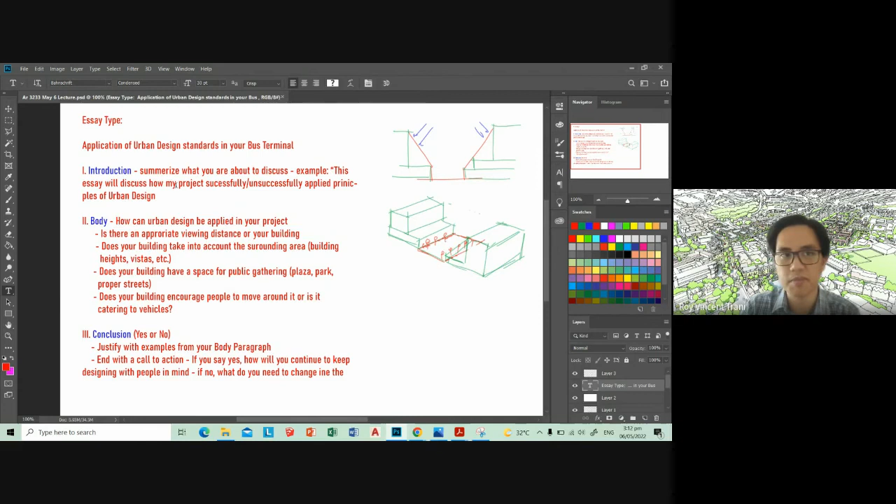So thinking about plaza, streets, viewing distance, heights of your buildings, and minimum or preferred dimensions for plazas. Plazas can be as small as 50 by 50, but they can only go as big as 150, maybe even 200. Because if you go bigger, it becomes like an open parking lot and there's really not much activity to do there. That's maybe one criticism of the Fuente Osmeña circle - it's a bit too big.

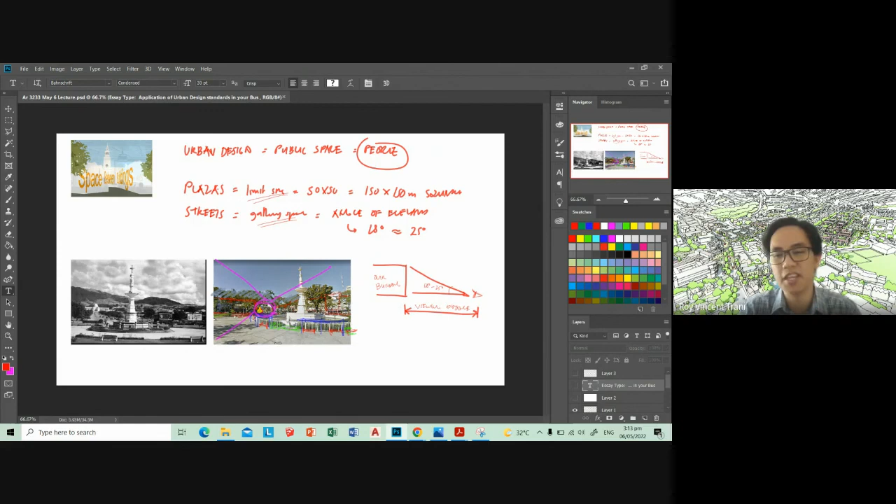And now, because there's no activities inside the plaza, it's become this park that people don't really go to, and they made more mistakes by adding more trees, further separating it from the urban environment. So what we're trying to do is connect the different spaces around our building so that they're more walkable, more accessible, and really just more valuable.